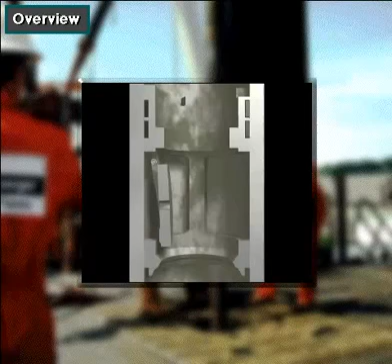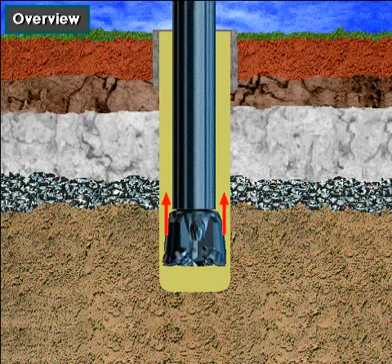Drill string valves stop fluids from flowing up the drill string. Often, if the well kicks with the bit off bottom, formation fluids flow up the annulus and up the drill string. Crew members close the drill string valves to stop the flow in the string.

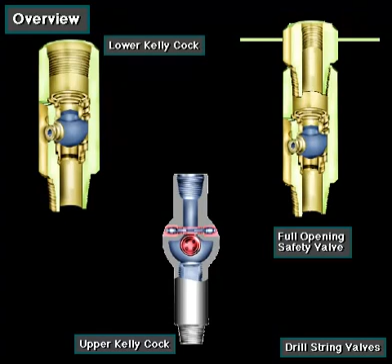If the Kelly is made up, they can close the upper or lower Kelly cock. If the Kelly is not made up, then they can install a full opening safety valve in the top of the drill string.

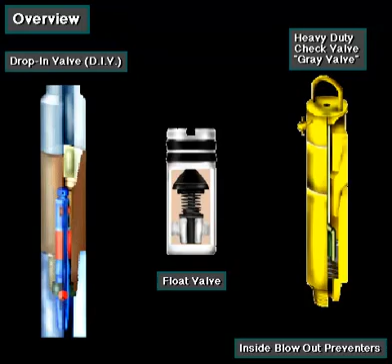An inside blowout preventer, or IBOP, is a one-way valve, a check valve they can install in the drill string. One type of IBOP is a float valve that is sometimes made up in the drill string near the bit. It prevents backflow up the drill string.

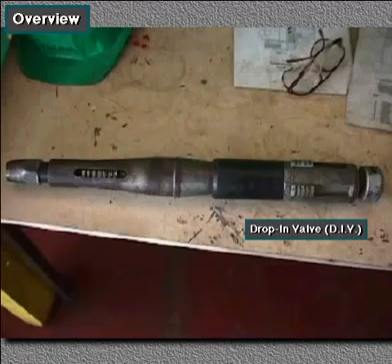Another type of IBOP is the drop-in valve, or DIV. It's dropped into the drill string and falls to a special landing sub that is usually located near the top drill collar in the drill stem. It allows the driller to pump mud down the string, but the check valve will not allow influx fluid to flow up the string.

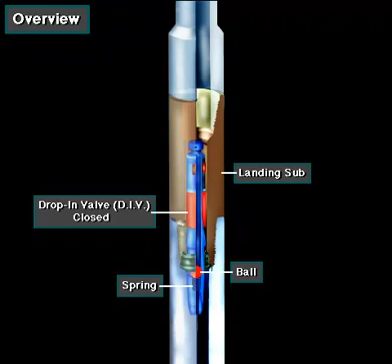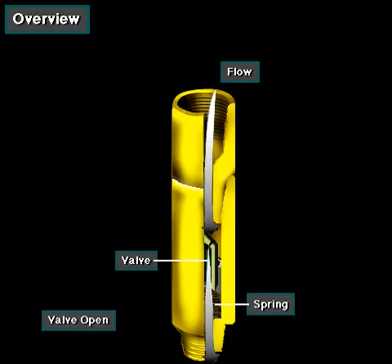Another type of inside BOP is the heavy-duty check valve, or gray-type valve, named after one company that makes it. It's a plunger check valve that crews stab in the drill pipe at the surface. It's usually used during stripping operations. Stripping is when the crew lowers the pipe in the hole while the BOPs are closed and under pressure.

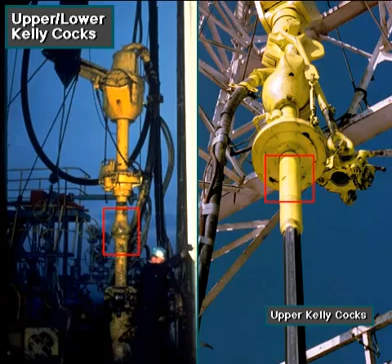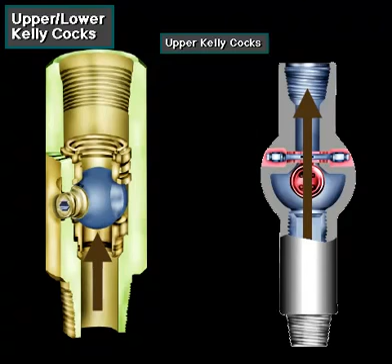An upper Kelly cock is located above the Kelly. The upper Kelly cock normally serves as a backup to the lower Kelly cock. If the lower Kelly cock failed, crew members would use a special operating wrench to close the upper Kelly cock. The closed upper Kelly cock prevents further flow. It protects the equipment above the Kelly from high-pressure flow.

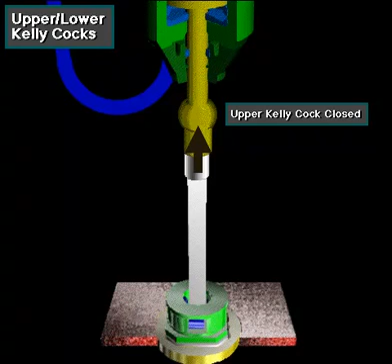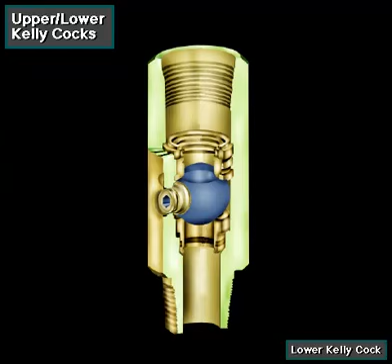Usually, crew members close the lower Kelly cock if a kick puts risk on equipment above the Kelly. They make it up in the bottom of the Kelly. A crew member uses a special operating wrench to close it. The crew can also close the lower Kelly cock to keep mud from falling out of the Kelly when they break out the Kelly to make a connection.

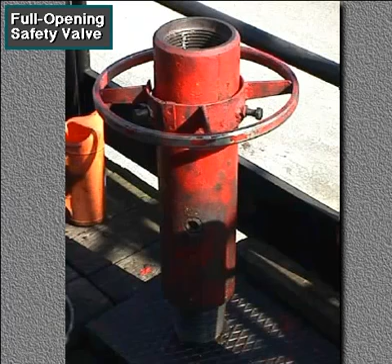Here's a full opening safety valve. If the Kelly is not made up in the drill string and flow occurs, crew members can insert the safety valve in the drill string. This procedure is called stabbing.

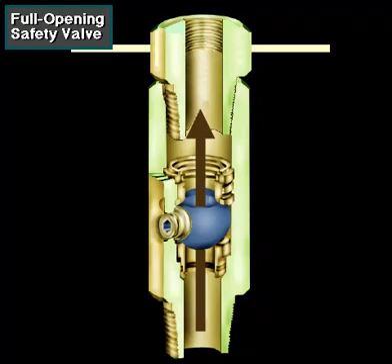A full opening valve has as large an inside opening as possible. When fully open, flow from the drill pipe passes through the valve with no additional restriction. This relatively large opening allows the crew to stab the valve against pressure coming out of the drill string.

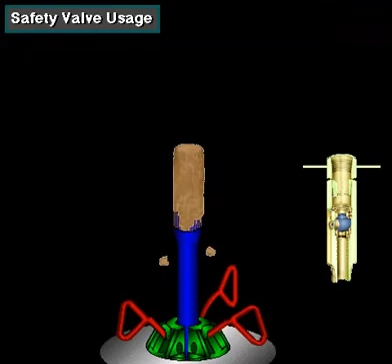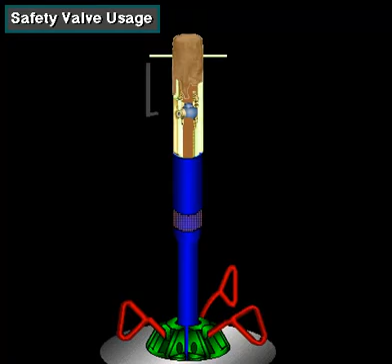The crew picks up the safety valve by its lifting handles. They make sure it is fully open and stab it into the drill pipe. Then they screw it into the pipe. Finally, they use a special operating wrench to close the valve and shut off flow.

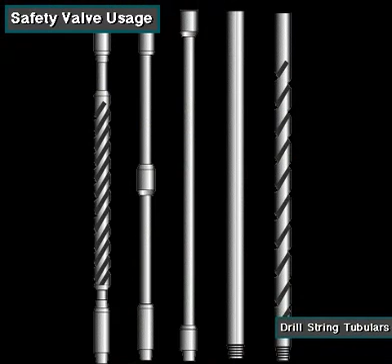Drillers should make sure the rig has the right crossover subs handy on the rig floor. Crew members should be able to make up the safety valve in any drill string member coming out of the rotary. For example, if a drill collar is in the rotary, the safety valve's threads may not match the drill collar's threads. They will need the right crossover sub to make it work.

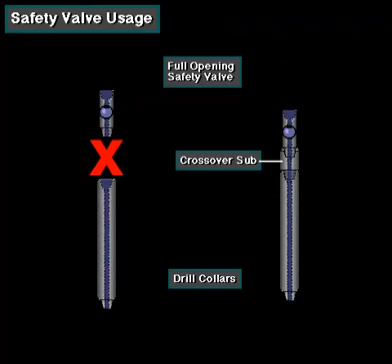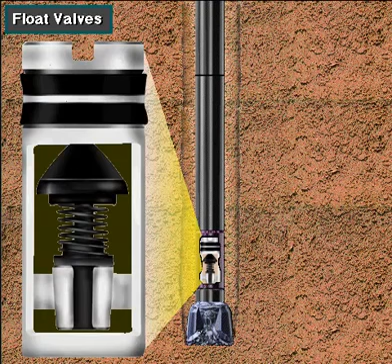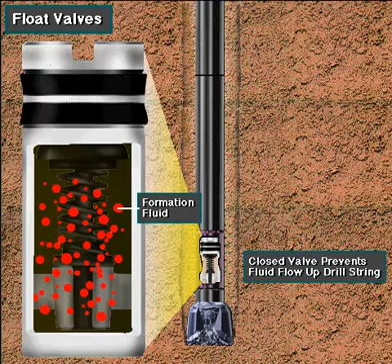Float valves also prevent flow up the drill string. Crew members place a float valve in a sub, a special drill string fitting, just above the bit. One type allows mud to be pumped down, but shuts against upward flow. Under normal conditions, pump pressure moves drilling mud through the open one-way valve. An influx of formation fluids from below causes the float valve to close. This prevents further flow up the drill string.